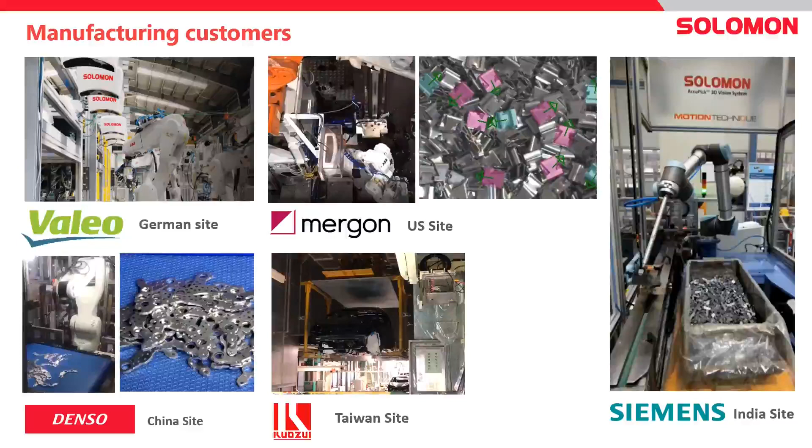For example, we have systems implemented in Germany, such as Valeo, in the US, like Mergon, Siemens in India, and Denso in China, and so on. Those are just some of our site references I would like to highlight in manufacturing. Also, today our focus is logistics. We want to tell you what 3D AI solutions can be used in the warehouse. Those are our loyal customers, like Haier in China, DB Schenker in Singapore, Thailand Tobacco in Thailand, and Pfizer in China. So this is our focus today.

Before we start, our solution is like a platform, a vision platform. We are able to integrate with different vision technologies, such as the structured light Solomon scanner, Intel RealSense, Microsoft Kinect or angular laser, because we believe different technologies bring different benefits in terms of budget, vision accuracy or field of view. So we will take a look at your projects and find the most suitable solution for you among the different vision technologies.

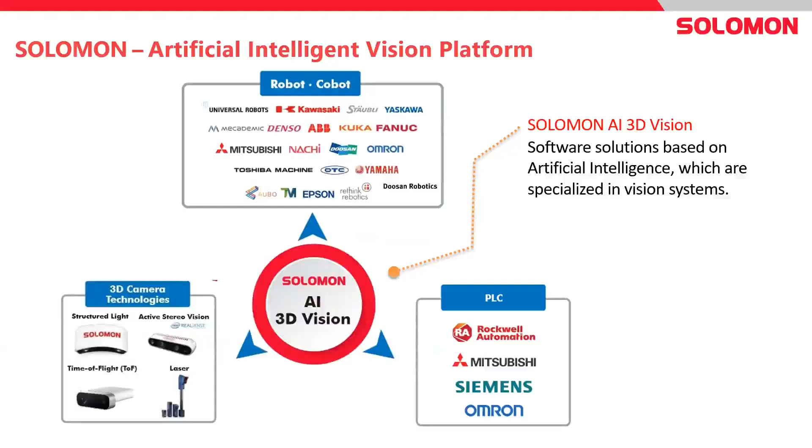Also, we communicate with cobots and robots through their controllers via TCP/IP, and we are able to communicate with major PLC brands as well. So our solution is flexible, and you can use it with different robots. As I mentioned, today we will talk about warehousing. There are 3 parts in the warehouse that can use our solutions. First is depalletizing. Second is piece picking for order picking in the fulfillment center. And last is today's topic, which we will go a little bit deeper into: parcel picking in the receiving area.

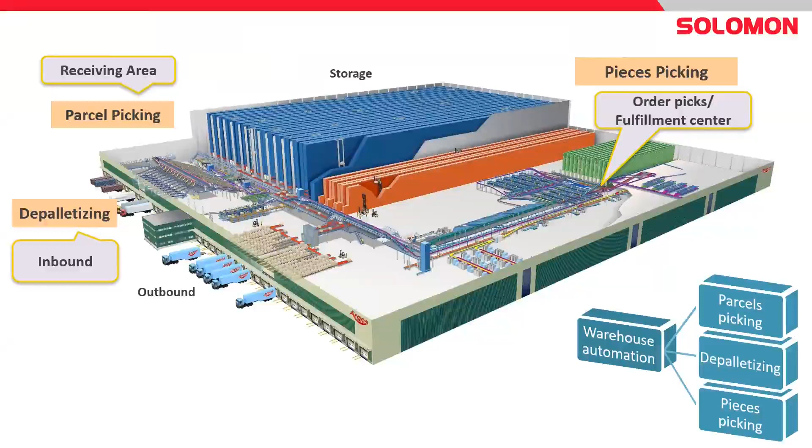So first of all, I will start with depalletizing. We receive a lot of inquiries from customers saying that they have a robot doing depalletizing, but they are tired of the different sizes and different patterns. They need engineering for different scenarios and different robot programming for different tasks every day. They want a vision system able to recognize any shape and size of pattern on the pallet, and be able to find them, locate them, and pick them. Also, sometimes during transportation the patterns shift out of position, so they need to recheck with our vision systems.

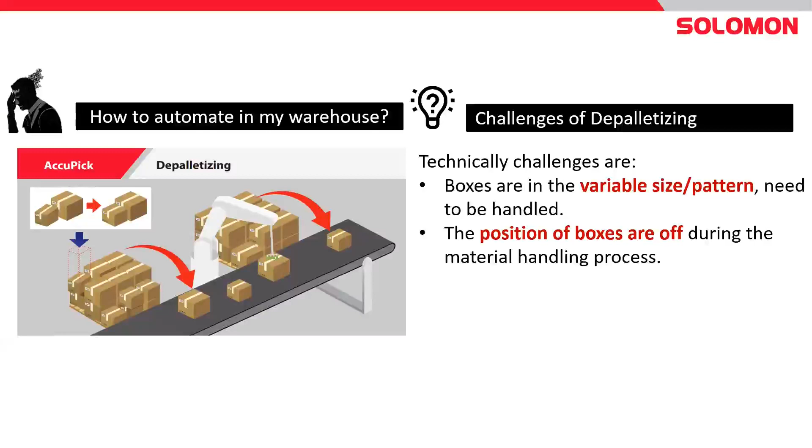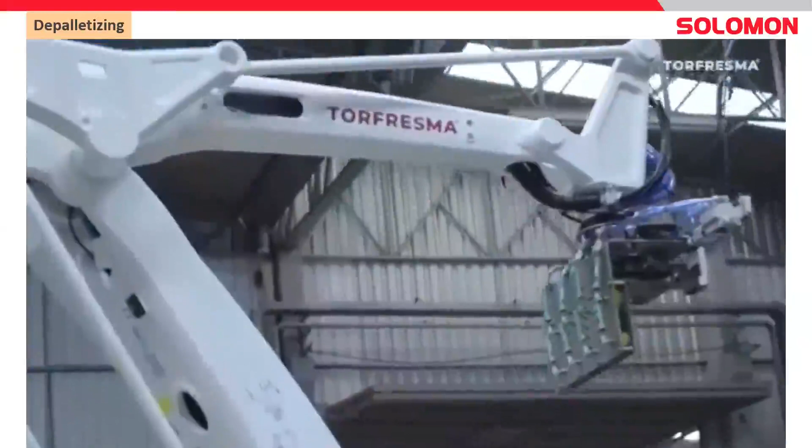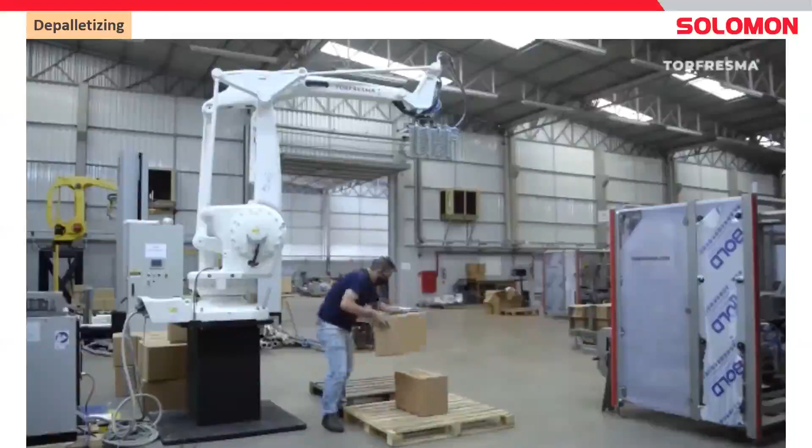So I will share one fresh example in Brazil. Torfresma is our partner who implemented 2 systems on site. This is the testing video they filmed for us. You can see their fine-tuned gripper, an L-shaped gripper, with the Kinect Azure and the Solomon scanner and Solomon software. The task here is to identify where the box is on the pallet randomly. The engineer tests with different positions, different layers, and different carton sizes, to see whether the vision can pick precisely, up to 1 centimeter tolerance.

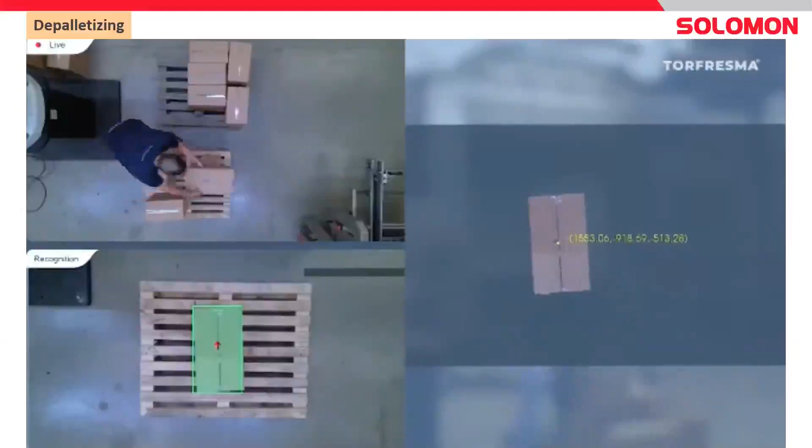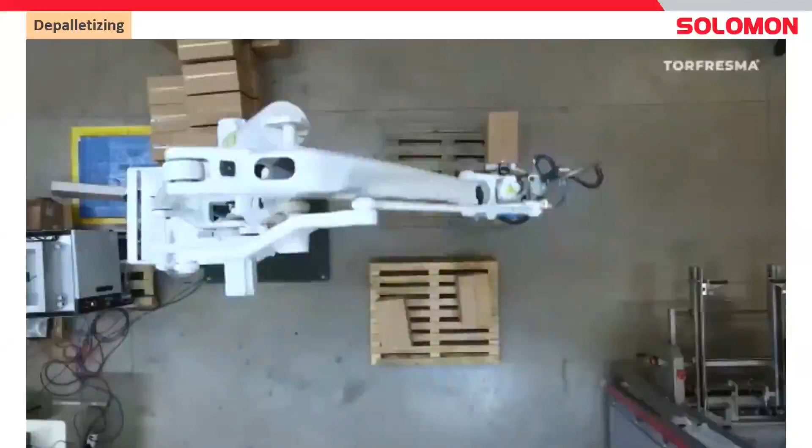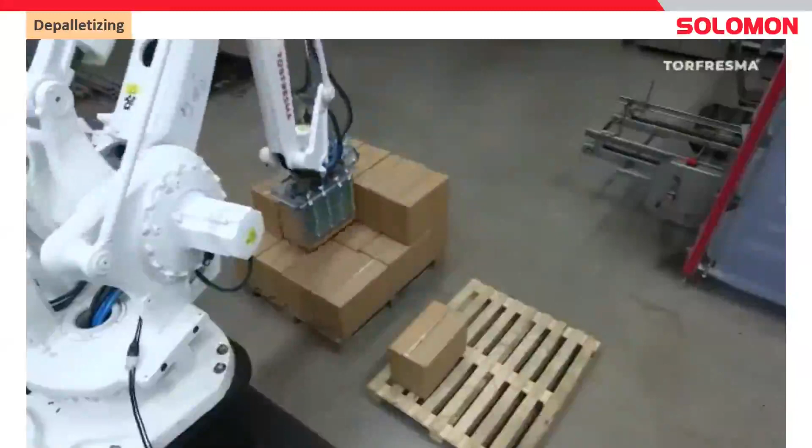This is their criteria. Using this system, you can see the Solomon system is able to locate the cartons with their orientations and the depth sensor. So it is very easy to find the boxes correctly and integrate with the ABB robot to complete the depalletizing task. By using this solution, your warehouse no longer needs complicated robot programming according to the patterns, changing the program every time. Simply implement one vision system with the robot, and you are able to see the cartons in 3D.

Second, I would like to introduce piece picking. Actually, this is quite a challenging task for us as well, because in the real world there are a lot of materials, for example, soft bags, irregular packs, blisters, or paper boxes. Those are the different materials we have to see in the bin, and we even need to consider using different grippers and different suction cup sizes, doing a tool change for the different packages.

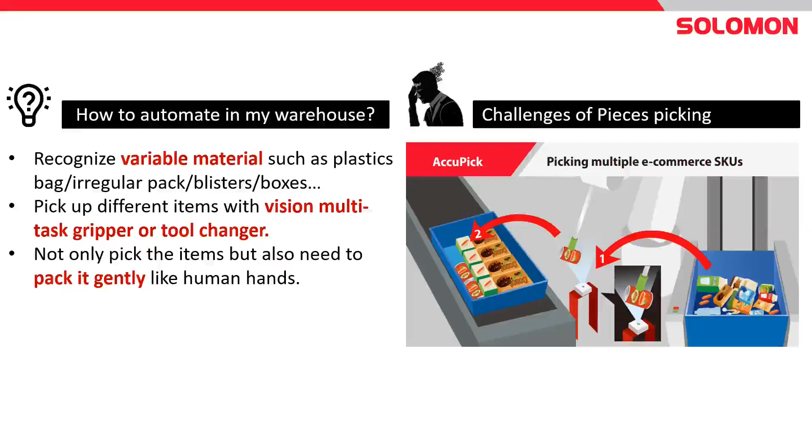Also, the customer requires us to not only pick but also pack gently in the outbound, or let's say shipping box. So it's more like human hands. We need to nicely pack their groceries without damage. Here, I would like to introduce you to the system with a video.

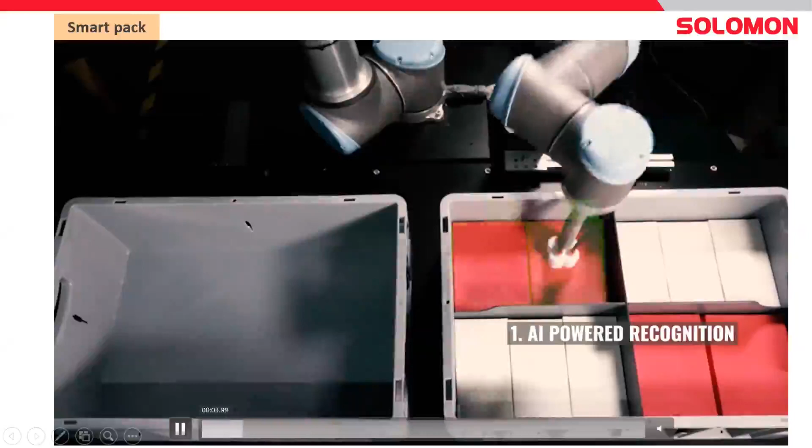So for SmartPack, in the beginning, of course, we need an AI to recognize where the boxes are in the bin in the dedicated area. Second, we need a dimensioning scanner to see the size of the picked boxes. And third, a camera is doing the point cloud measurement. Our software will, according to the size, find the most suitable space to place gently.

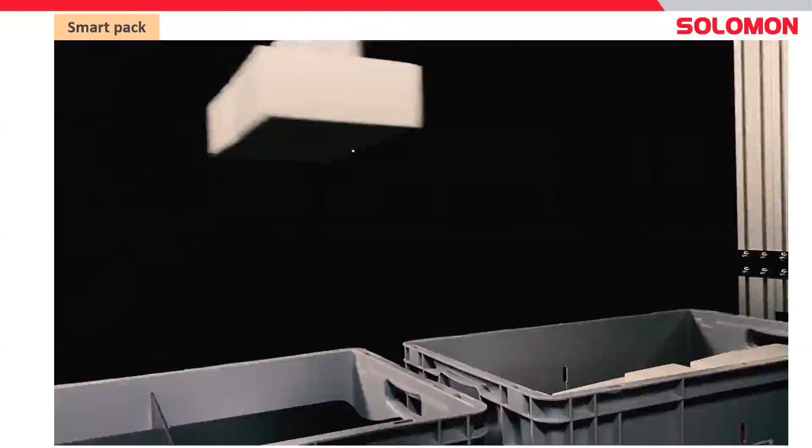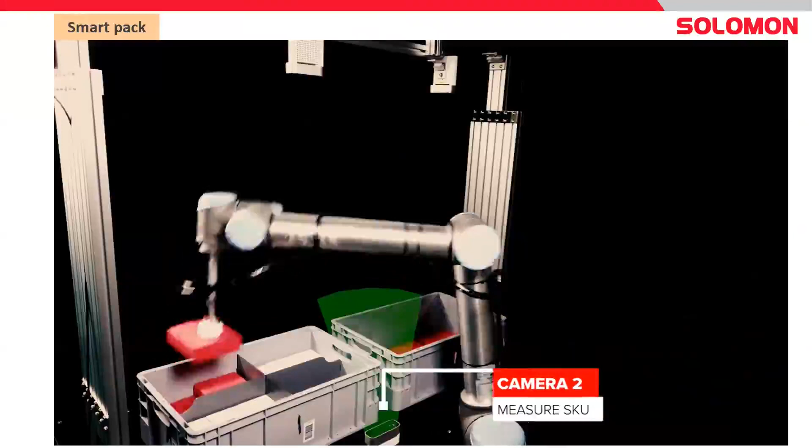So pick first and measure second. Third, place gently; this is our solution we call SmartPack. So you will see we manipulate 3 cameras in one system to do the pick, measure, and place. We are able to precisely dimension the size, and according to the space of the bin, we are able to do the packaging job. So you will see here are 3 cameras, 3D cameras in total, we are using.

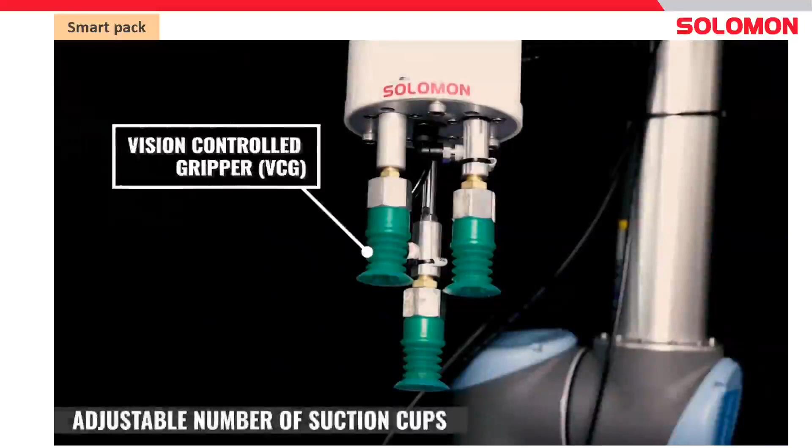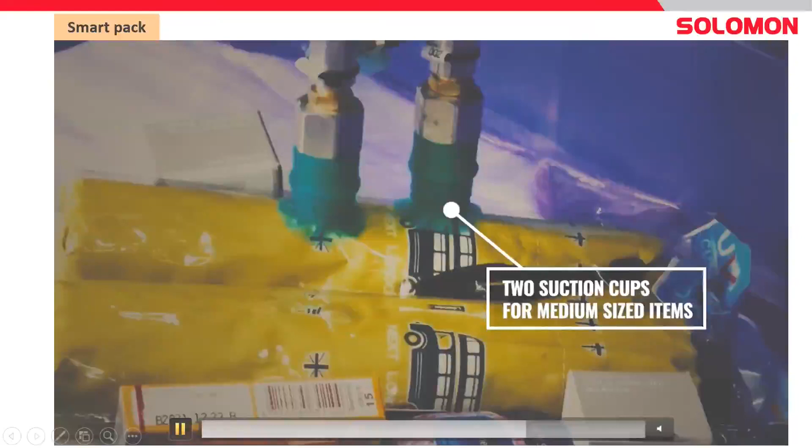By doing this, you are able to place the items with maximum space. And this is the solution we do for different size packages. For example, if you have some small items, you need to only use 1 suction cup. And if you have, for example, long items, you need to use 2 suction cups, or 3 or 4. It depends on the gripper size you design, and also the package you are going to pick.

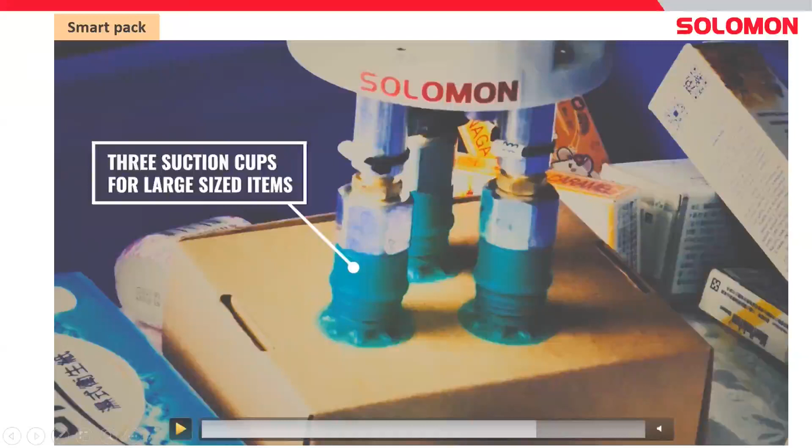The AI vision is able to detect the size roughly. And according to the ratio of the size, you can control how many suction cups the gripper uses in real time. So this is one part of our solutions for the different grippers. And you can implement tool change as well.

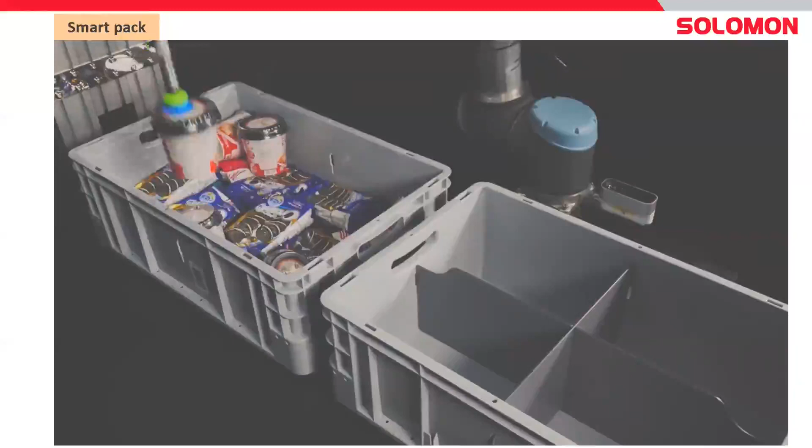So we have been testing these solutions with different packages, including the food industry, e-commerce, and different materials. This is the solution we can offer to you in the packaging stations. And here I want to explain the third solution, which is for parcel picking. Especially during the coronavirus situation, everyone is going online. And in the warehouse, it's actually a nightmare for the operators working 24 hours.

So the challenge in this scenario is the vision needs to act like a human to see the pick point and pick objects by the robot without double picking. So double picking is the first challenge. And second is the speed. We have to maximize the speed, and the target for us is not to delay the robot by the vision, but it depends on the minimum layout you can do with the robot. Our 3D vision will not make you feel like the vision is the major cause of the delay.

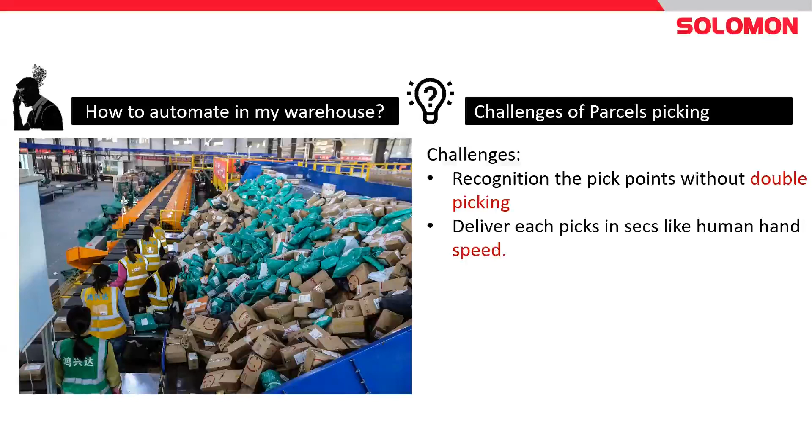So later on, I will share with you one of our real cases we have implemented for quite a big global company. They are doing air express mainly. This is the layout we designed for them. We use the Yaskawa GP12 for the testing this time. And for the vision software, we use Solomon JustPick version 4.

For cameras, we have one for the picking, the second for the measurement, and the third for checking if there are any foreign objects on the conveyor. So there are 3 cameras in total, 2 3D cameras and 1 2D camera. The gripper we designed according to the customer's maximum and minimum weight, and also considering the size as well. And we also have the flipper machine here.

You can see my mouse, because the customer has a 5-side barcode scanner in his system. So if there is any barcode underneath the boxes or parcels, we need to flip them so that the barcode scanner can see from the 5 sides. And the parcels need to be placed with the orientation considered precisely, because their sorter machines need a consistent orientation. So we also have to check the orientation of the parcels when we are placing.

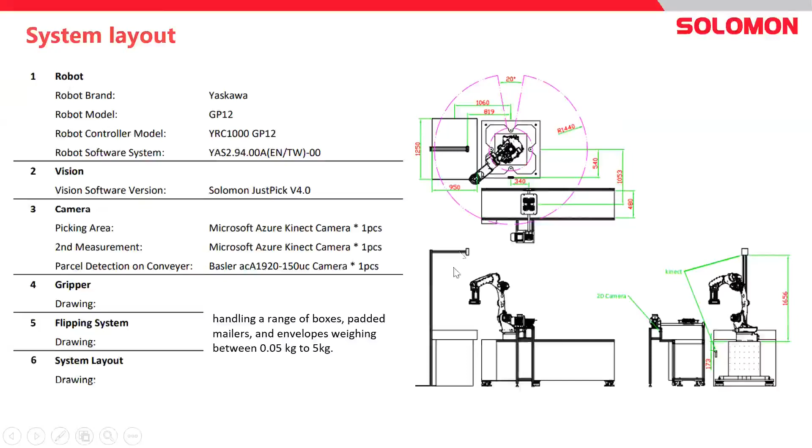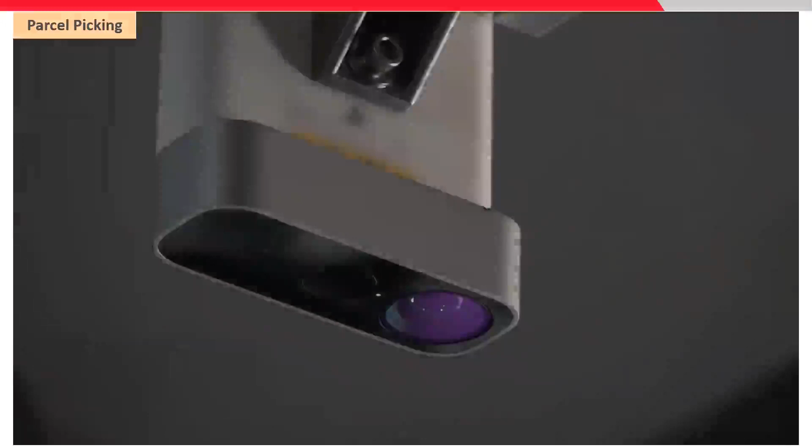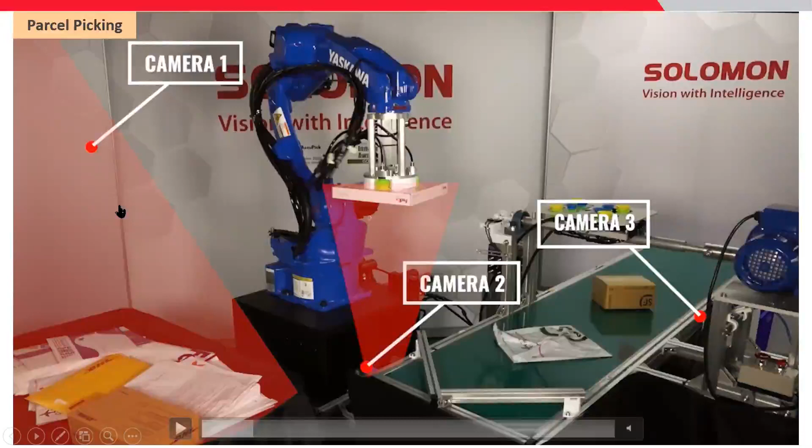So this is the layout: we pick from the parcel station by robot, and we place on the sorter in-feed conveyor. And here I would like to show you the video of our solution. So this is the Yaskawa robot we use. And again, we use the 3D camera and the gripper. So in total, we have 3 cameras implemented. The first for picking, the second for the orientation check and the barcode scan, and the third for safety. If the flipper needs to turn the objects down, we have to make sure there are no objects under it.

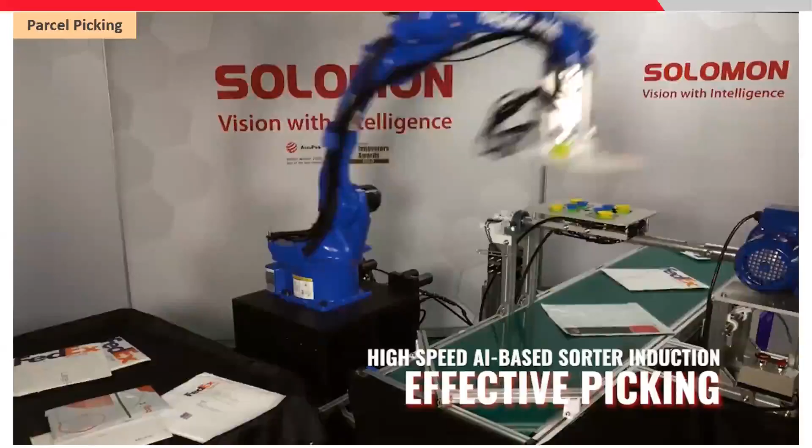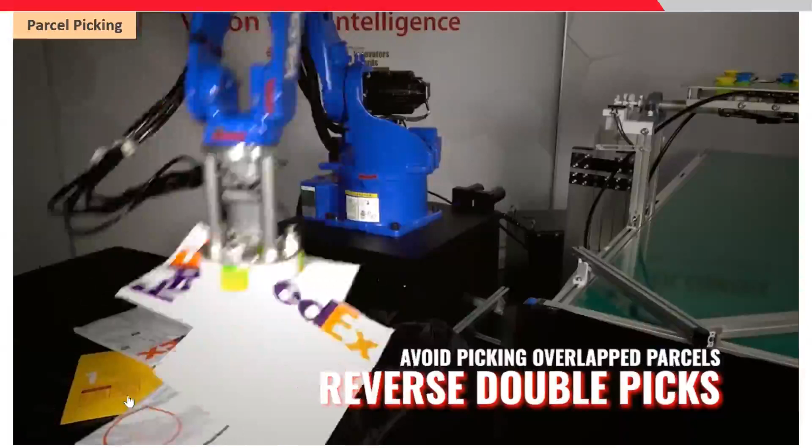So the speed is one of the keys. We use our pre-configured AI model to pick the variable items, including the parcels, envelopes, boxes, without previous training; we use a deep learning model. And also for the double picking, our vision is able to detect if there is a double pick situation. We will return the parcels to the station to scan and pick correctly, singulating only one parcel.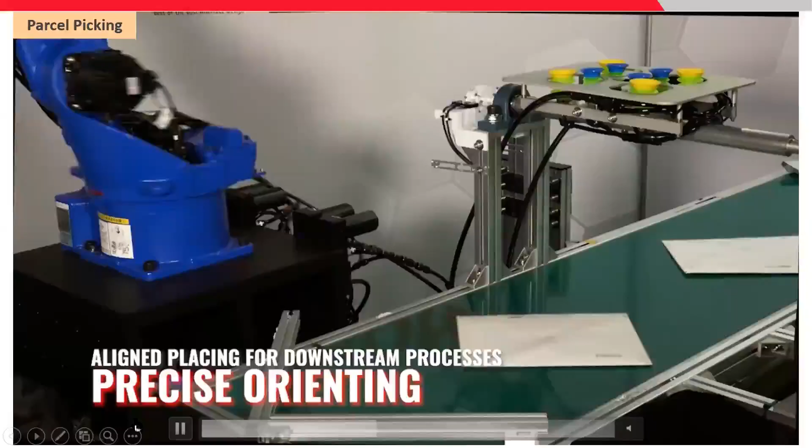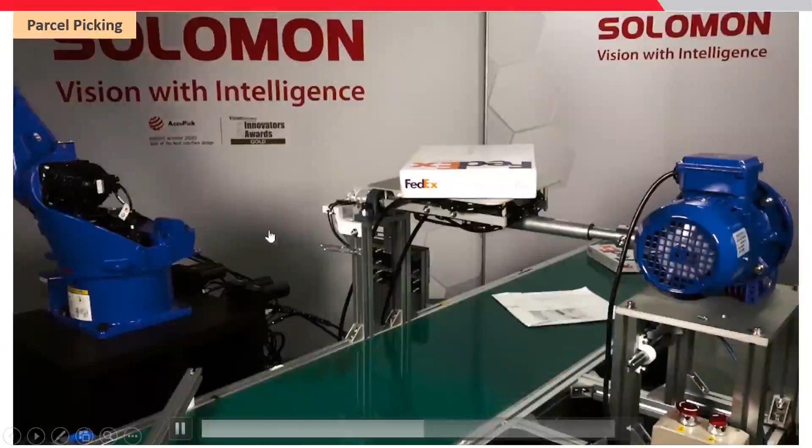Also, as I say, we have to consider the orientation of each pick. So you will see the boxes and bags need to be aligned with the in-feed conveyor so that the sorter machine can sort properly with consistent angles. And if our barcode scan checks there is a barcode underneath, we will put it on the flipper machine to make the barcode face up.

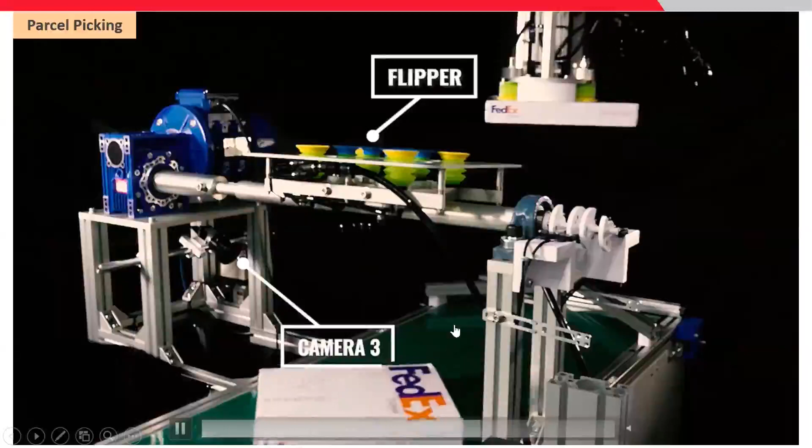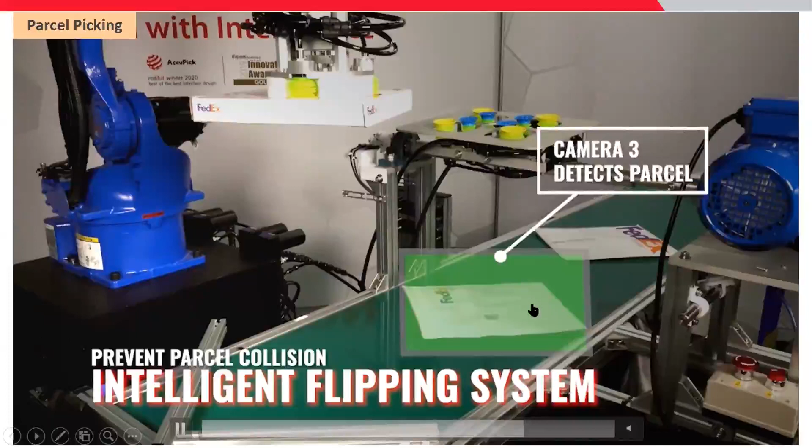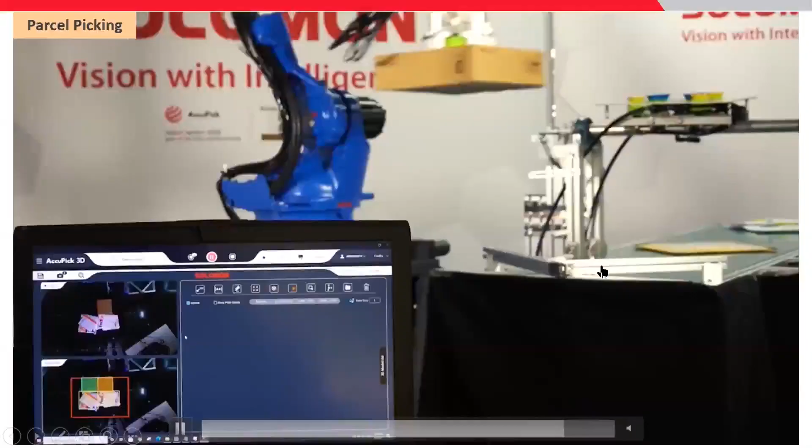For the third camera, the function is checking if there are any objects before the flipper turns. So for example, here, it detects parcels, the flipper will pause, and the robot will wait as well. So you can see this solution is already fine-tuned for your sorter inductions, with the cycle time, precision, and the AI model already pre-configured. So let's review what is the outcome of these solutions.

First of all, for your sorter inductions, you have the barcode scan. Also, like our customer here, we need to flip up the barcode. So here you will consider the barcode flipping machines. The result is 3.4 seconds on average. And if you break down the cycle time, 3.2 seconds is for the robot motion, and 0.2 is for the second camera for orientation and barcode scan.

And I want to highlight one point: our cameras can work simultaneously and individually. So once the robot moves away from the picking area, the camera starts working already. When the robot returns, it won't delay your robot for the next pick point. So the only vision delay will be the measurement in the second camera.

The reason why I separate it here: 3.2 is for the robot motion. In terms of the layout, this is the time it requires. It could be shorter if you use a more compact layout, depending on your on-site situation. And 0.2 is the time we need for the orientation and the barcode scan. So this is the average time consumed in our test of this scenario.

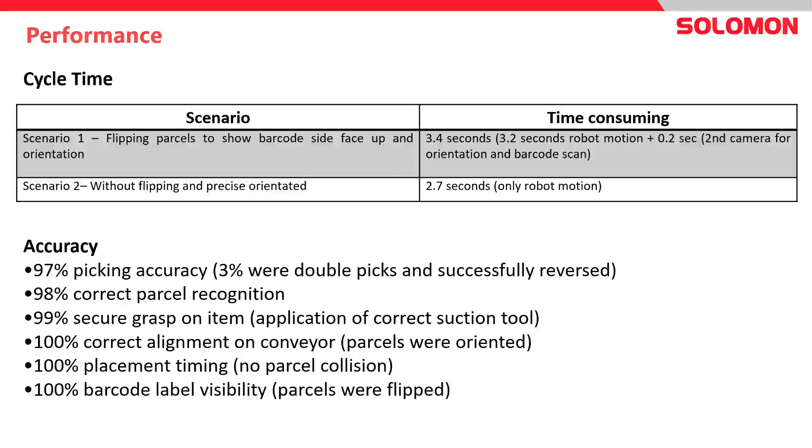For the accuracy, under the test we achieved 97% picking accuracy. 3% happens under double picks, and we are able to successfully resolve these double pick situations. And 98% correct parcel recognition, 99% for the suction cup to pick each weight of the boxes. And the orientation, the cycle time, and the barcode scan, those three are really stable under our test. So this is acceptable to our end user, and they are happy with the performance right now.

Let's highlight this system and tell you why our customers like these solutions. First, we consider the flipping situation. When the barcode needs to face up, we scan it, we detect it, and we turn it up. This is one of the benefits. And second, we are able to do the second measurement to see the exact position and angle of these cartons, these boxes. A lot of solutions can only pick and place, but we are more advanced; we consider placing correctly and nicely on the conveyor.

And third is, of course, the cycle time. We are not going to take your time from the robot. Our vision time will not delay it. Most of the cycle time is purely the robot motion according to your layout design. And fourth, we use our vision solution to detect double pick scenarios, because this is not 100% preventable, but we have solutions to avoid this situation and to return the double picks.

So we believe AccuPick 3D is, I would say, a comprehensive solution for your sorter induction site, to improve the overall cycle time and the efficiency at your site.